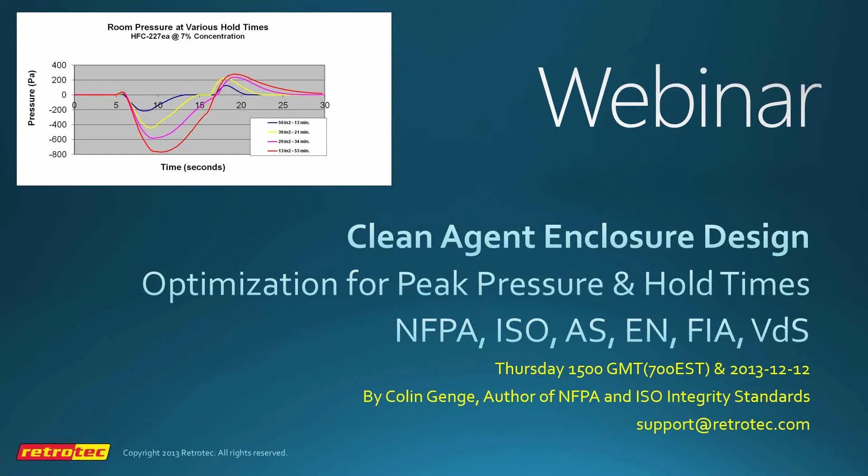I'm not going to focus on these as much as I've done in the past, but suffice it to say that the Door Fan test has replaced the discharge test. The discharge test was costly, disruptive, but its main negative feature was its environmental impact, which deep sixed it. So it's seldom used anymore except in CO2 installations.

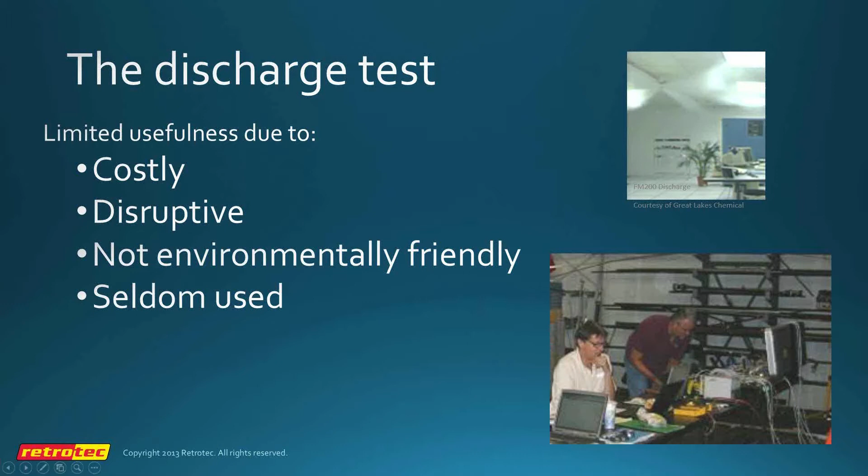There are 2 reasons to be using it now. There used to be only one. The second reason is to measure the pressure relief venting, which is a requirement of NFPA. And so far in the U.S., we've got roughly about half of the installers using the new software and doing peak pressure evaluations.

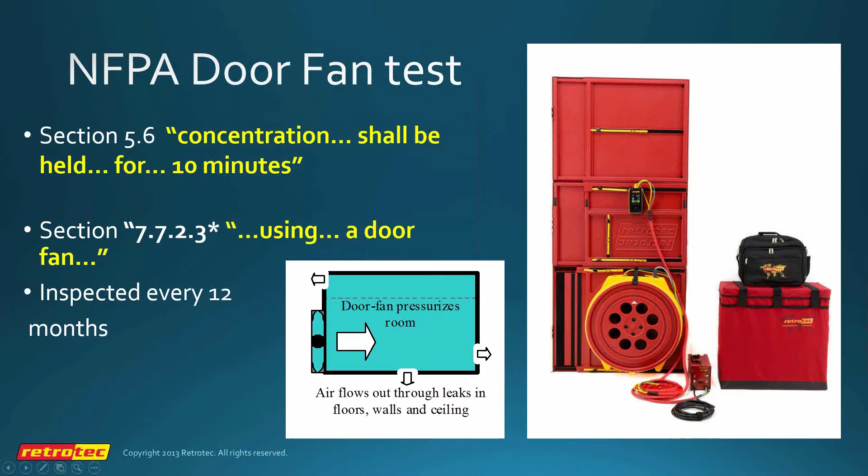This is the actual section in NFPA that talks about the requirement. Just a quick note on the NFPA, I didn't include this in my introduction, but back in 1984, I was the one who discovered that door fans could be used to determine whether or not a discharge test would be successful, and 3 years later managed to write a standard for NFPA that showed people how to use a door fan instead of doing a discharge test.

And as most of you now know, it's being performed in about 60 countries. ISO's adopted it, the European norm has adopted it, and so on. So it's become pretty popular. I spent the last 5 or 6 years rewriting most of the NFPA standard in order to make enclosures pass more easily when they should pass, and at the same time to allow them to pass the peak pressure requirements or to measure the effectiveness of vents.

You can see here with the old NFPA, we've got an FM200. With the old NFPA it would give 9.3 minutes and fail. The new one would give 10.4 - not a lot, but around a 12% improvement there. And on the peak pressure side, if the peak pressure requirement was 250, the new NFPA would pass, the old NFPA would not pass.

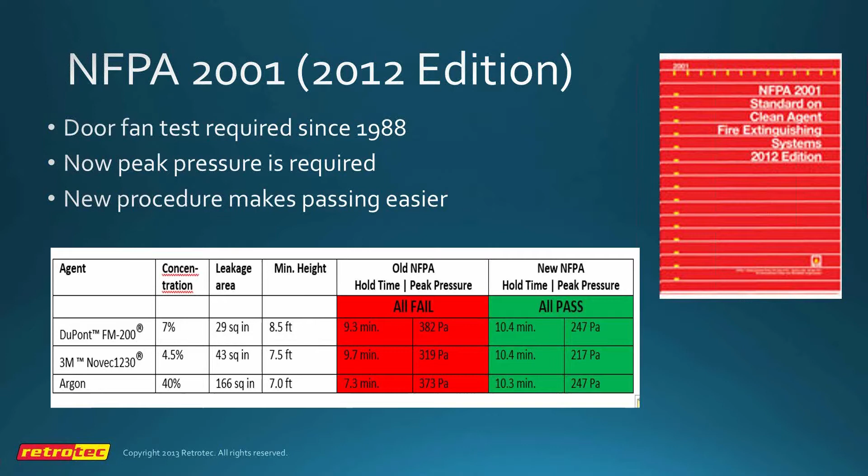So there's not too much that we don't know about it. Most of the manufacturers of equipment and agents rely on us for peak pressure and enclosure integrity, meaning hold time issues.

The ISO 14520, 2006 edition, also requires a door fan test. The calculations are different. It uses what's called a wide interface, which decreases hold time by 25%.

The new proposals that we have accepted by the ISO committee remove some of that conservatism, and in some cases it's extremely conservative. The NFPA is optimistic in some cases, but the truth actually sits somewhere between the two, and we're in the process of resolving that.

One of the issues with the ISO standard is that in one of the sections it requires protection to 90% of enclosure height. Many countries have written that out of their standard, that they don't require that. It forces the enclosure to be exceptionally tight, I think unnecessarily tight, and forces the use of PRVs in every installation.

Which can be a good thing, I guess, but it does provide an element of risk in that the enclosures are so tight that if the system discharged and the vents didn't work, the room has danger of being damaged, and in some cases it's quite likely.

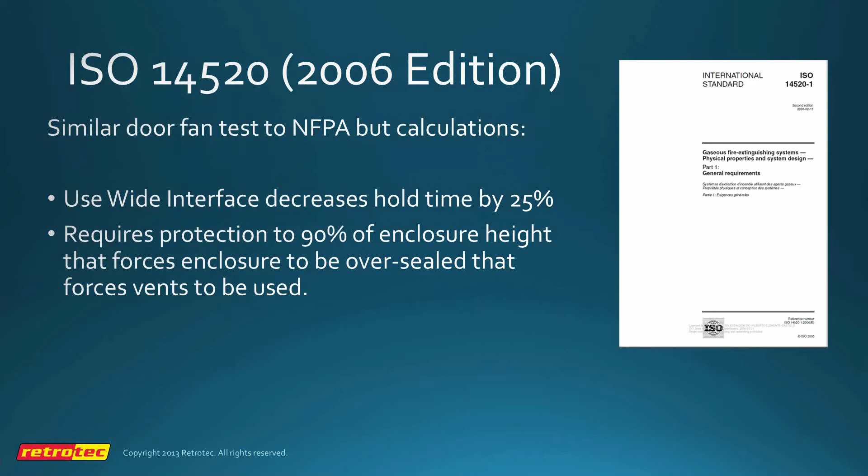So the first thing we're going to talk about is peak pressure. In the sequence of events, an agent is discharged, and unfortunately in these cases a little bit too much pressure was created.

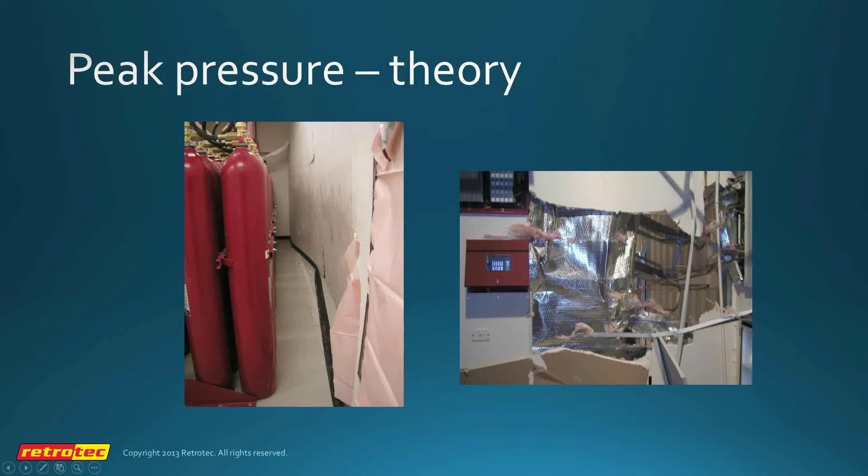If an agent is discharged into the enclosure, and in the case of an inert, for example, which most of you would be most familiar with, certainly from a peak pressure standpoint, we get a very short-term, short-duration pressure spike, where the valve opens wide open and goes up to its maximum point in 2 or 3 seconds and then drops off exponentially.

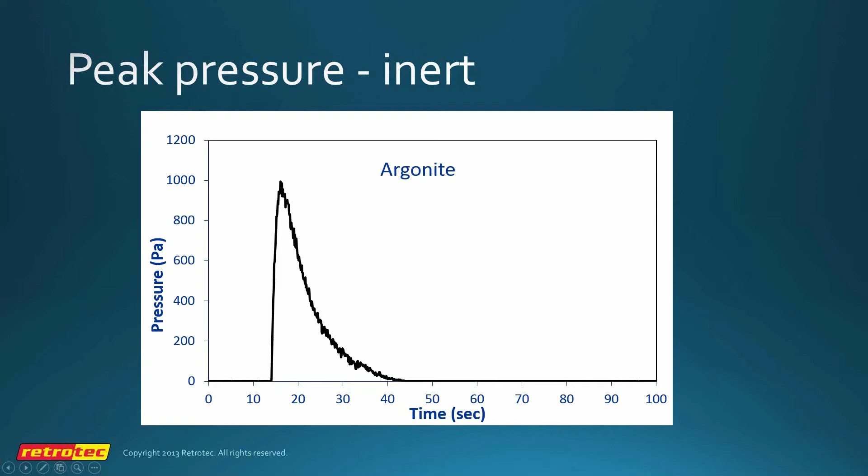What wasn't known until we did our research study was that the halocarbons can produce just as much peak pressure. If we were to discharge this into the same enclosure, a halocarbon and an inert, the inert would produce much more pressure. However, because the halocarbons are much heavier, they must be much, much tighter, so therefore they get more pressure. So in the real world, they often produce roughly about the same amount of pressure, but it depends.

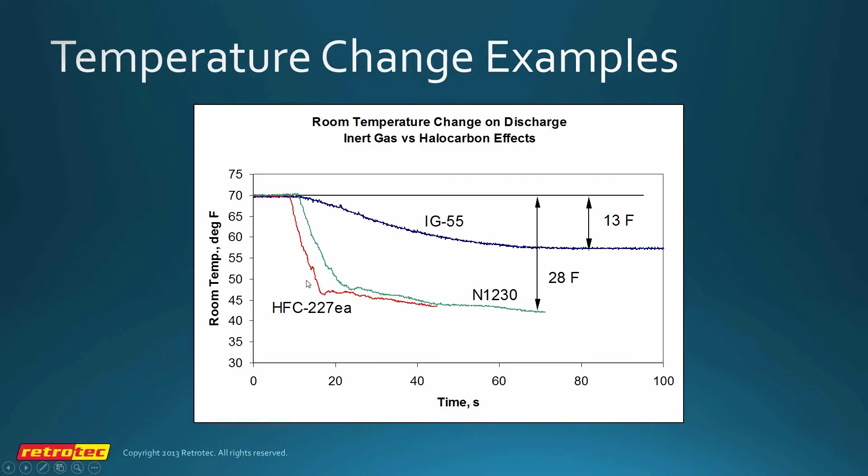The cooling with both halocarbons that we have here, 227 and Novec, is much, much more of a negative pressure creation. But the important part is the time at which it takes. Here, this cooling of the room happens in 4 or 5 seconds, and that's what produces a negative pressure spike that looks something like this.

So this one looks like a characteristic curve of Novec, has a very high heat content. So this is zero pressure. Upon discharge, the pressure drops.

As the agent, after most of the agent is in the enclosure, there is a period where the nitrogen in the tank is blowing down, and there's not much more agent coming into the room. The agent flashing from a liquid to a gas is what causes cooling, just like if you put alcohol on your hand and it evaporates, you get cooling.

The positive pressure spike is a result of increased mass coming into the room, no more cooling going on, as you saw in the previous graph, and a bit of a positive pressure spike.

This negative pressure spike is determined by the relative humidity. If the relative humidity is very low, this pressure spike is very large. If the relative humidity is very high, this negative pressure spike can disappear altogether. And the way I like to explain that is if we try to get a liquid to evaporate in 100% relative humidity, it doesn't evaporate very fast, so therefore there's not much cooling.

So along with everything else, when we're dealing with the halocarbon, we have to know the range of humidities that we're expecting in that enclosure to determine the range of peak pressures that we might experience.

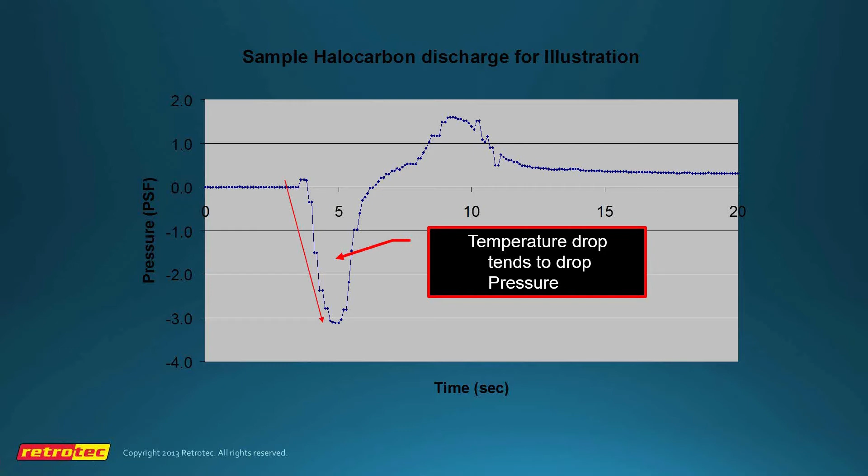So again, here's another halocarbon, in this case HFC 125. You notice they all have the negative spike followed by the positive spike.

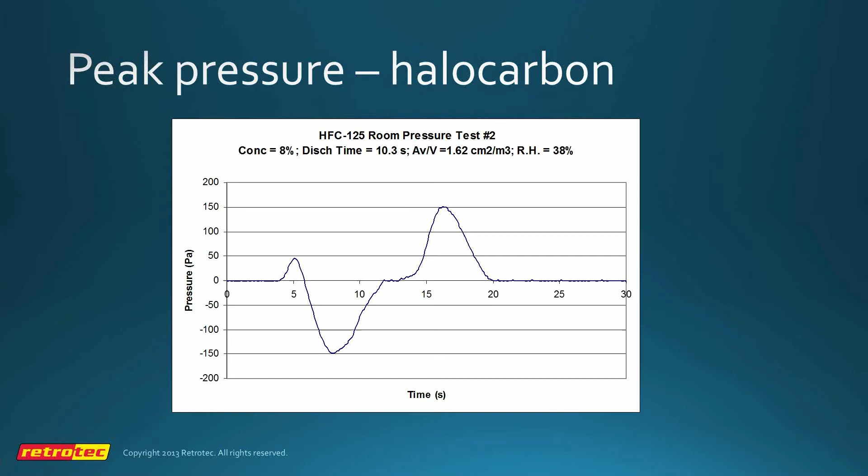This negative spike depends on what we call the leak to volume ratio. So if we have two enclosures, one's twice as large, and the second has twice the leakage of the first, they will have pretty much exactly the same peak pressure. As the enclosure gets tighter, the peak pressures become greater, and it just magnifies the size of that curve.

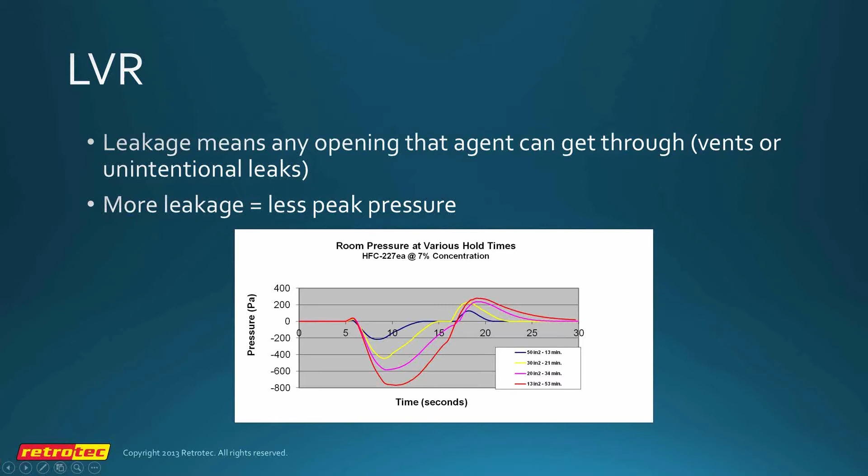And if the leak to volume ratio is sufficiently small, then we may often have to install a PRV to control it.

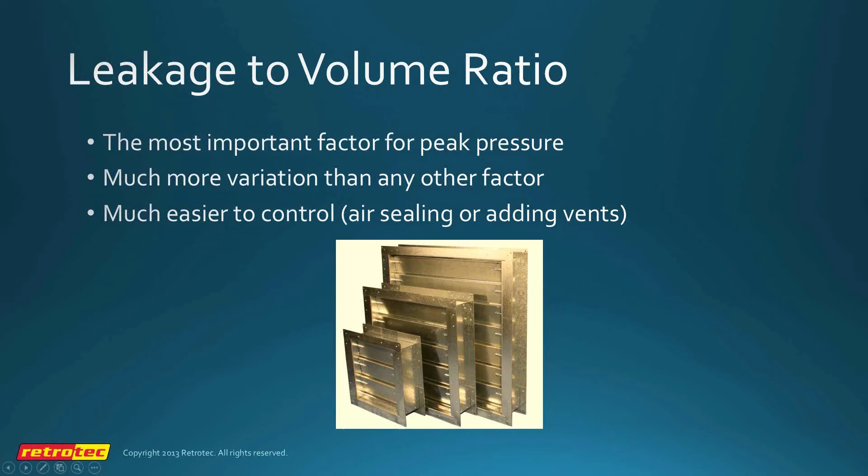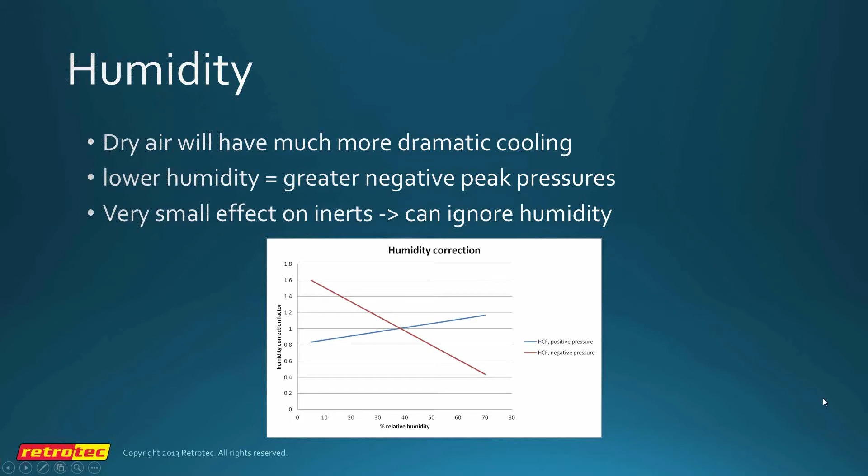There are important design features that must be considered for peak pressure. First, we have to know the enclosure strength. We need to determine the range of leak to volume ratios and estimate the peak pressure based on the agent type, the type of valve, discharge rate, and the leak to volume ratio. And then that would go into the sizing of the vents.

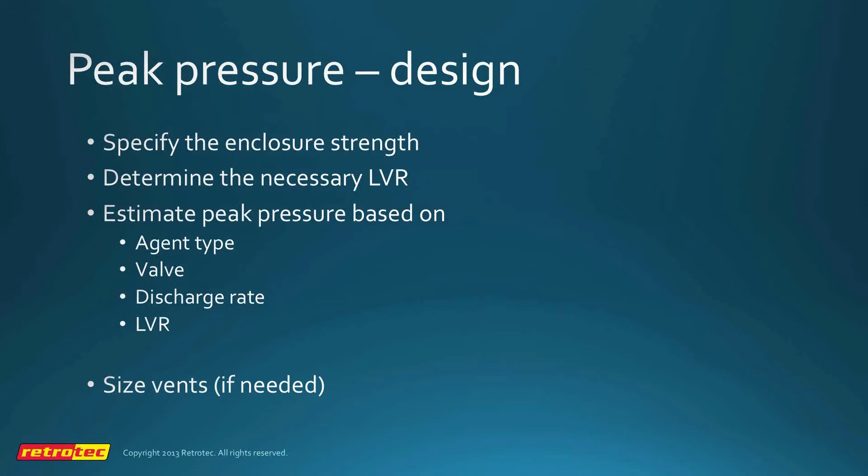NFPA requires the working plans to include an estimate of the maximum peak pressure, and a specified pressure limit has to be included - I believe this is Annex D1, this is NFPA. The enclosure, of course, must be capable of withstanding that pressure. So there's various bits and pieces spread throughout the standard that talk about peak pressure evaluations.

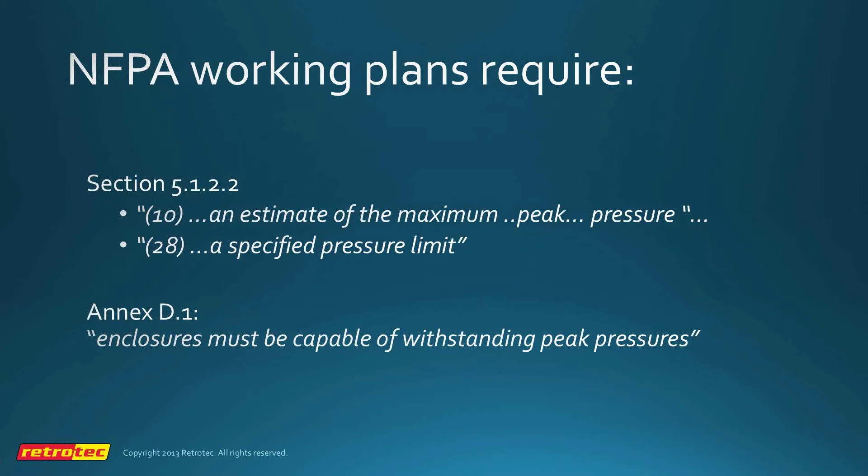Under ISO section 7.4.1, we have very similar wording. The standards are almost rubber stamps of each other - a lot of the wording is identical, and the intended purpose is very, very similar.

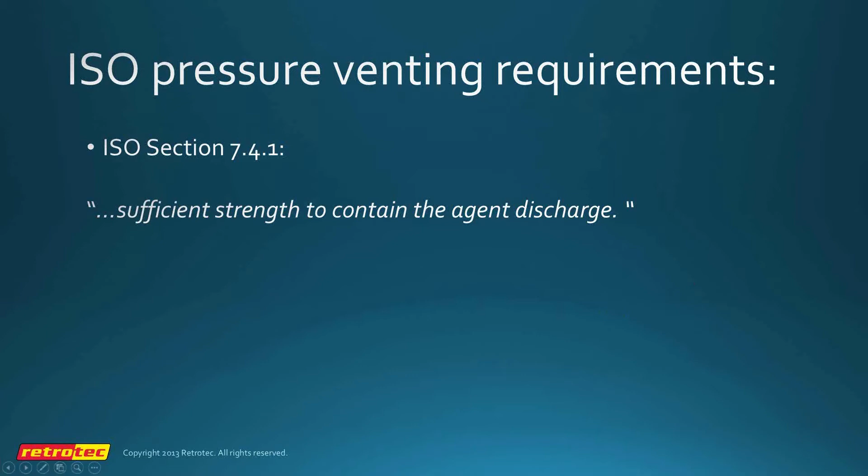Our peak pressure study went on from about 1998 for 4 or 5 years - we thought we'd be done in the first year, but we didn't complete it until 4 years later. What we discovered was that there's a variety of peak pressure formulas out there, most of them supplied by either the agent or the equipment manufacturers. These are three - I'm not identifying which ones they are.

There's a couple problems with how they were created, three altogether actually. One is that they assume the relationship between pressure and peak flow rate, which is what causes peak pressure, is a square root relationship. It's not a square root relationship. So these formulas are mostly square root relationships, but this is not a square root relationship - this is the data that we took.

The other thing is that they were not taken at the area of interest. The area of interest is actually in a leak to volume ratio somewhere in this range, because the enclosures are tightened down to get a 10-minute retention time, so we kind of know how tight the enclosures are. The data was probably taken somewhere in this other area - I'm not sure, but it wasn't taken in the area of interest, and it wasn't taken over a wide enough sweep.

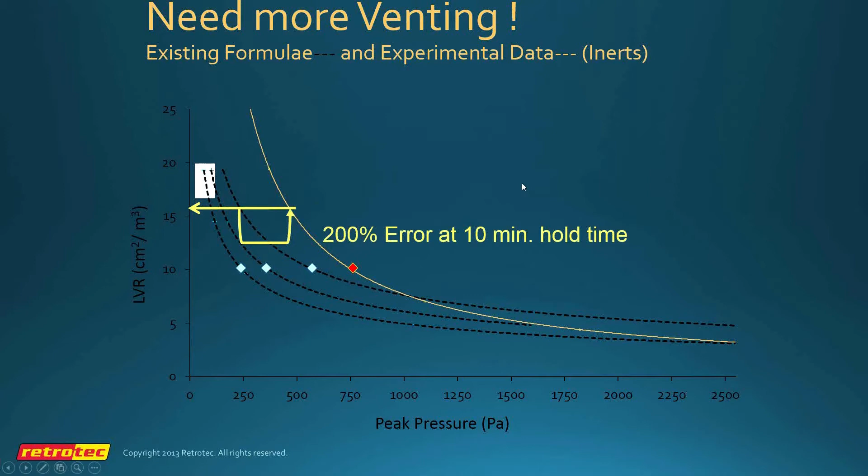So the message there is that the existing formulas, the existing data, is under-predicting peak pressure by 200%, sometimes 400%. That's the first thing people say when they run the new equations - oh my God, VDS says that we're going to have only a quarter of the pressure that you say.

Our data was done over a wide range, and more importantly, the data was taken in enclosures that were measured in the same way that we measure them with the door fan. If we have an enclosure leakage area, there's a lot of different ways of measuring enclosure leakage area.

In order to make sense of this, we have to be measuring the enclosure leakage area the same way we're going to be measuring it on the job site. There hasn't been correct correlation because manufacturers over the past 10, 15 years have been creating their peak pressure formulas without measuring enclosure leakage the way we measure it in the field, so we don't get the proper relationship.

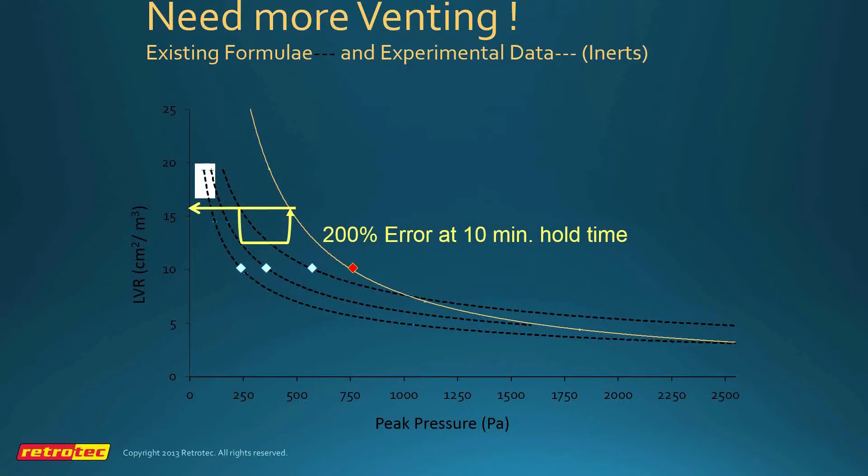So for all those reasons, the existing peak pressure formulas out there don't predict anywhere near the peak pressures we're actually getting. That's the bad news. The good news is these enclosures will actually take a lot more pressure than we thought they would. I think peak pressures in the range of 1,000 pascals are commonplace and get experienced all the time. We just haven't come to accept that.

The way that we evaluate that is with what we call our FanTestic Integrity software. I think most of the integrity tests done worldwide have been using our software since 1986. Roughly around 3,000 different companies have been using it on a regular basis. I would guess that probably 1 million tests have been done with our software in the past.

The addition we have now is the peak pressure part - we say venting and peak pressure analysis has been added. We did have peak pressure analysis in our old CA2000, which was the best information available in the year 2000, but unfortunately it wasn't very good, and a lot of it was manufacturer's information. We now have much better information, which is why we're no longer supporting our old CA2000 software and going with FanTestic Integrity, because it's the one that gives the right answers.

There's various questions here about the performance of different agents and so on, and it's simply a matter of putting those agents into our software and it gives you the peak pressure values. We'll be going over that in more detail as we progress.

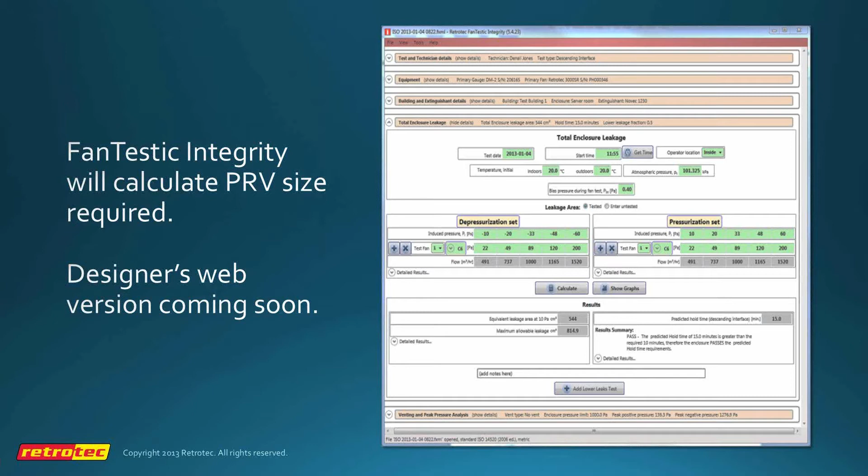I want to move on to the next item - this is a dual acting PRV. You can't actually tell it's dual acting just by looking at it; in fact, it might not even be dual acting. But these dual acting vents can be ordered, and more importantly, they can be measured with your door fan. Whenever I get one, I slap it into a cardboard box and apply some pressure with my door fan to see how that vent performs. They just about always perform very differently than the manufacturers say they perform. Sometimes there's something about the vent itself or the installation that prevents it from performing properly. It's very easy to use your door fan to check these vents.

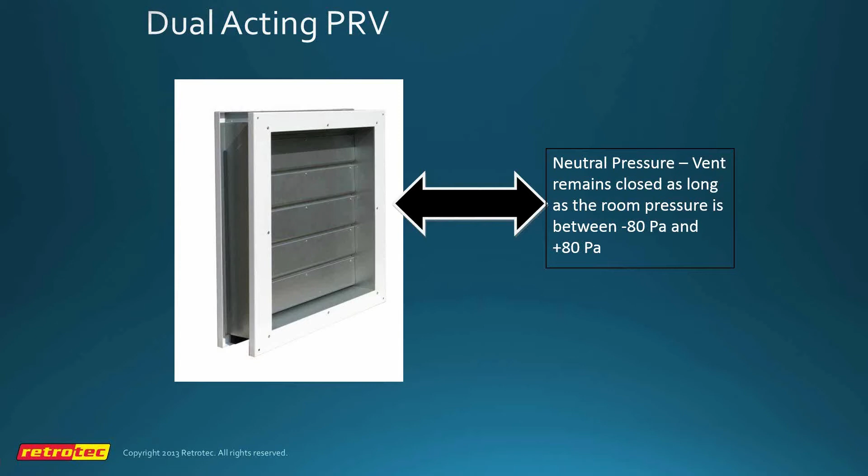I like to have them fully open at around 80 pascals or so, 100 pascals in that range. This fan system we have here is probably very similar to the fans that most of you have. We've developed what we call a contra-rotating fan that will measure PRVs at 500 pascals and put out 4,000 CFM at 500 pascals, making flow measurements that normal fans won't do. If that's something you're interested in to measure the performance of your PRVs, by all means, talk to us about it.

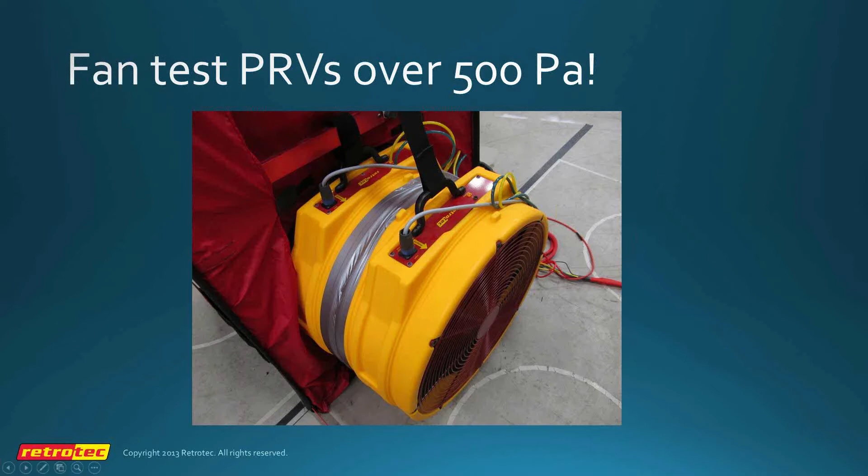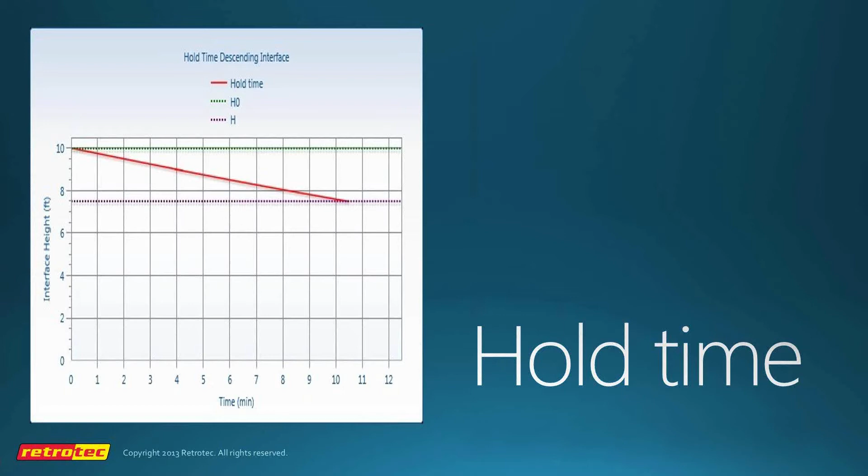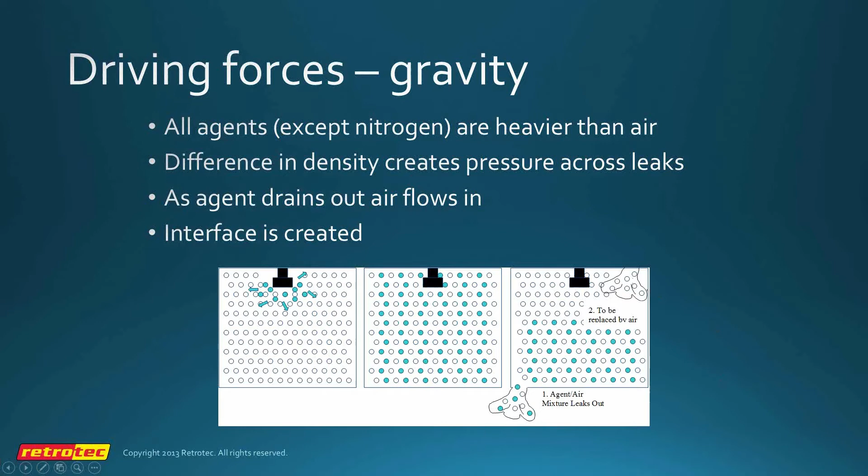So now we're on the hold time part. We've covered the pressure relief venting, now we're into hold time. The driving force for hold time is primarily gravity, at least in most cases. Agent leaks out the bottom, air comes in the top, and you get an interface between the two. There are dynamic discharge pressures that occur when the agent releases that we've talked about.

These peak pressures, even though they may be quite high, there's an assumption that they result in a lot of agent being lost. In fact, they don't, particularly with halocarbons, because there's so much cooling. When the agent is released, the agent's not going out, but air is coming in, so we're actually increasing the mass inside the enclosure because we're cooling it. So we don't actually lose anywhere near the amount of agent that we thought we were losing - particularly with halocarbons, we wind up keeping almost all the agent that's discharged.

The formulas say that if you do a 10% concentration, you're going to lose roughly 10% of your agent. In fact, you lose maybe 1 or 2%. As a result, if you're discharging say 10%, you actually wind up with 10.8 somewhere in there most of the time. Not quite the same with inerts, because there's not as much cooling with inerts - there's a lot more mass of agent going into the room. The concentration formulas for inerts do allow for much more losses. So in both cases, you will get more concentration than the manufacturer's equations dictate.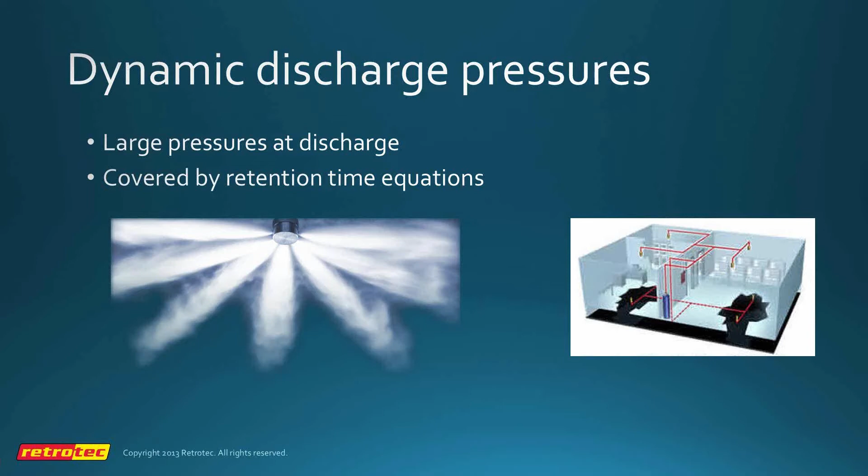The next thing that will push the agent out are static pressures. In some cases, we might have pressurized control rooms, pressurized rooms on either side, up, down, or sideways. We have to go around the enclosure and measure the pressure underneath all of the doorways to find out what the pressures would be during the discharge. And very simply, that's how we do it.

In some cases, stack effect will cause a static pressure. Buildings that are very, very high can sometimes have a 50 pascal stack pressure. The kinds of pressures we're dealing with in these enclosures due to gravity are 1 or 2 pascals for inerts and 10 to maybe 15 pascals for halocarbons. So stack effect can be huge.

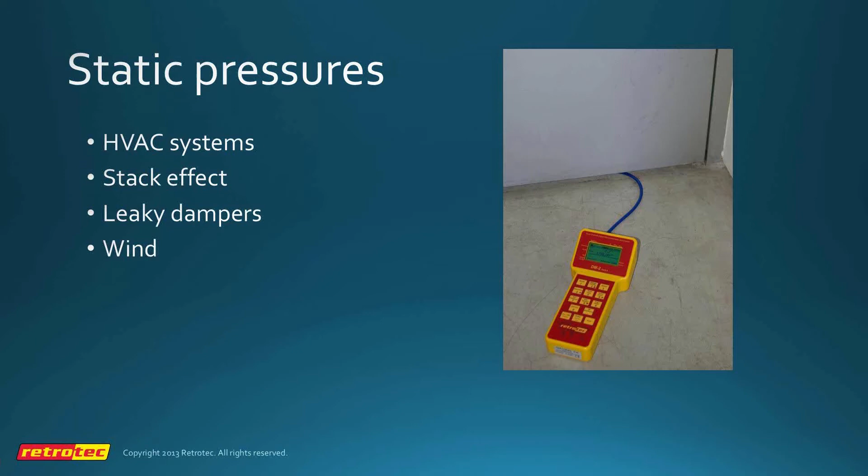Leaky dampers in the HVAC system can cause agent to get sucked out, and wind can also blow the agent out. For many years I've put proposals in for wind losses, which I think can be the same as gravity losses, but I can't seem to get anyone to pay attention to that. They are still real in enclosures that are exposed to wind, and wind can be the major driving force. That would probably fall under the section that requires special engineering, but it's something that needs to be considered.

So NFPA employs what we call a sharp interface. It says that at time equals 0, the agent fills up, or the enclosure fills up with agent. Agent runs out the bottom, and we've got a layer of air on top, as you can see here, as time progresses.

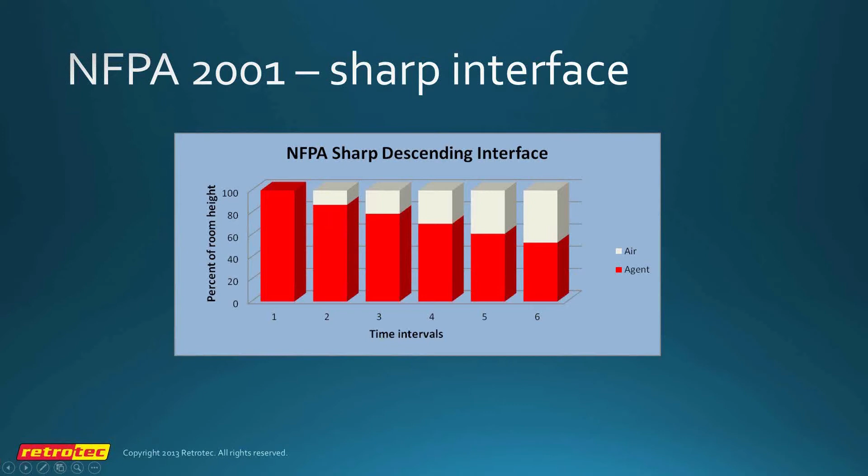The ISO assumes that we have an ever-widening interface, a slow mixing between the agent and the air. In fact, the truth is somewhere in between those two, and these agents, when they come into the room, have what we call a characteristic thickness. Most of the time, for halocarbons that runs around 0.2, 0.3, 0.4 meters, up to about 1.1 meter for an inert. So it's not an ever-increasing interface thickness—it does get thinner. In fact, we've noticed that as agent comes out, the interface, instead of widening, actually gets narrower. We have all the documentation for that, which is why we've come up with new equations that ISO has accepted for what we call not the wide interface, but the thick interface.

Todd Hetrick of 3M and myself worked on this. He did his master's thesis on that, and I consider he and I to be the two world experts on interfaces. Fortunately, all the information that we have on that is in the standards at this point, or in our software.

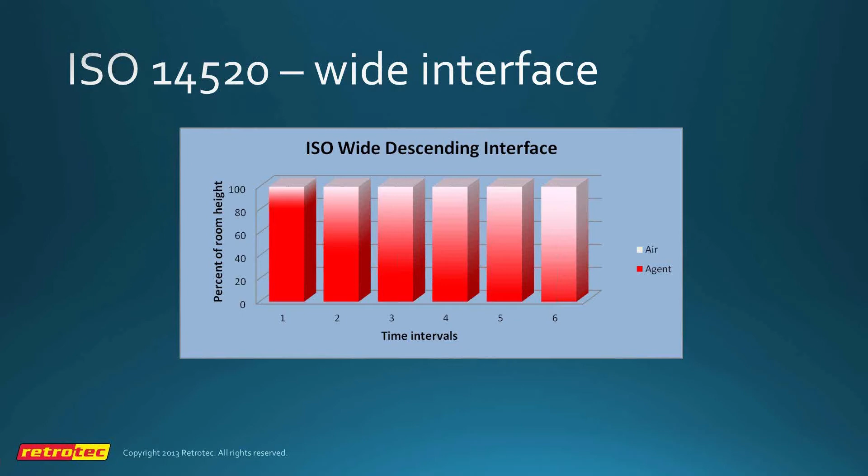Now, someone said the sound is completely gone. I show that my sound is working here. If anyone else can still hear me—it's back now. Okay, all right, good. Thank you very much. Hopefully I wasn't saying anything important during that time.

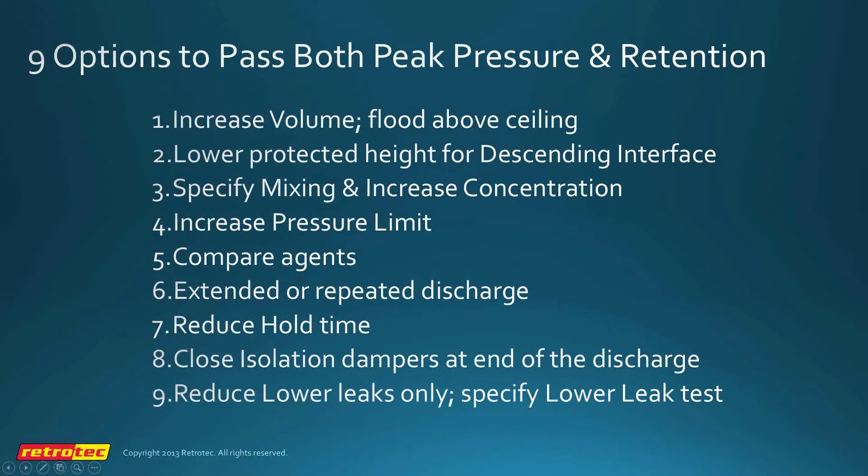In this section here, we've got 9 options to pass both peak pressure and hold time. Essentially, the name of the course is Optimizing Enclosure Performance, and this is how we optimize it by looking at these options that allow us to pass both peak pressure and hold time. Now, I've improved this from the previous versions by showing you examples in each and every case. So there's all 9, and we'll run through the first example.

The first example is that the more agent we put into the enclosure, the longer the retention time will be, and it allows us to have a leakier enclosure, which means we're going to have less peak pressure. The reason why these enclosures create peak pressure is we tighten them up so they have the appropriate hold time, and then we get too much peak pressure.

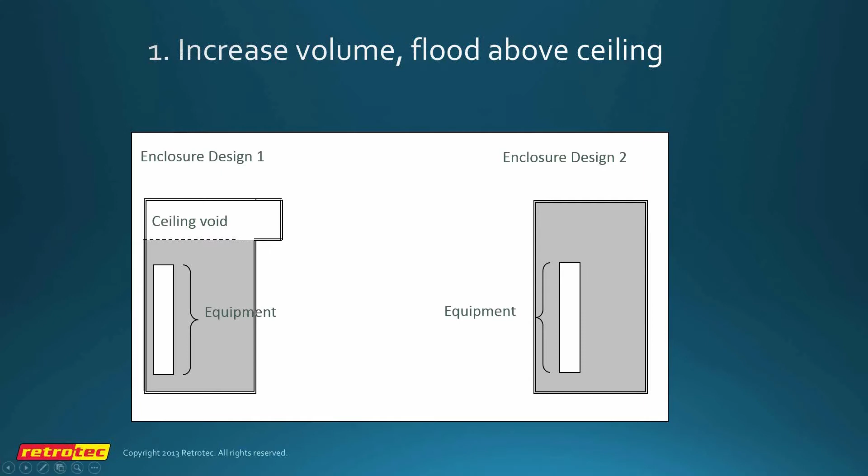So in this example, we've got a ceiling void where very commonly in the US we do not flood the ceiling void. In Europe and most other places they do. Using our new software, I've got two of them here—the before and after, if you will—one kind of superimposed upon the other.

So we've got a pretty much identical enclosure: 10,000 cubic feet, 10 foot high. This is what would happen if we flooded it and our minimum protected height was 9 feet—we would require a PRV of just over a square foot. If we flood the above ceiling space, we increase our volume, and we increase our maximum protected height.

The minimum protected height stays the same—we're still protecting to the same height. But this allows us to have much more leakage in the enclosure, which means we don't have to install a vent. It might sound like I'm encouraging people never to install vents, but this is the way you can get both hold time and peak pressure in the enclosure. The other way of looking at it is that I'm showing you a design technique that improves both circumstances.

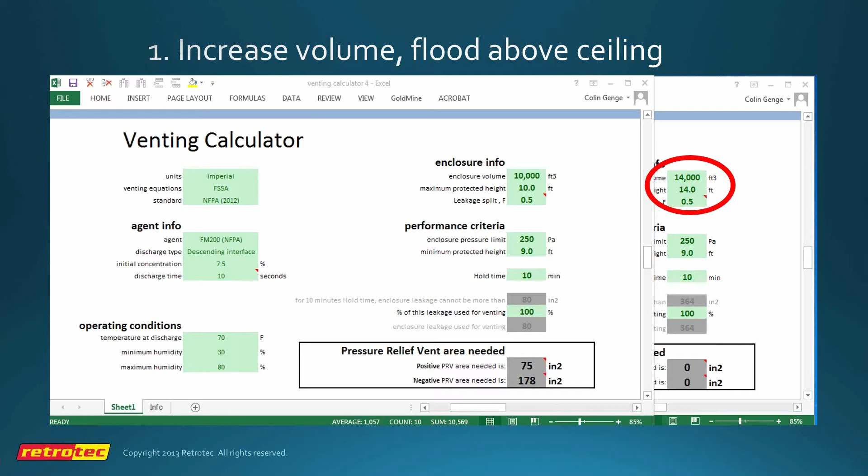Looking at it the other way, if we keep the total flooded height as low as possible, we're not improving fire protection, we're not improving the hold time, we're not improving the peak pressure situation. So that's the first example.

Number 2 is to lower the protected height for the descending interface. It doesn't make any difference for continuum mixing, but for descending interface it does.

So here's another example—this is number 1, and I've got number 2 superimposed. The only thing I've changed is the minimum protected height, from 9 feet down to 6.5 feet. You'll notice here again we need a vent, but here we don't need a vent. The reason for the difference is this enclosure does not have to be tightened as much, so we've saved money in not having to air seal it so much, and we've allowed it to pass both the hold time and the peak pressure requirement.

I can't tell you how many times I come into a room where they've got racks that go up to 6 inches from the ceiling, and they want that room tightened up enough to give them the required hold time—it's virtually impossible to do that. So we have to know that we want as much agent on top of the protected equipment as possible, not the smallest amount of agent. Seems kind of intuitive, and it is.

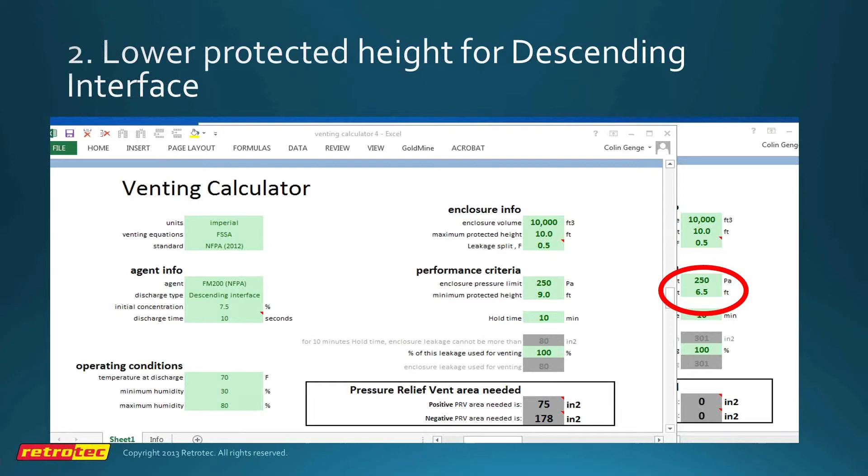So the next one is to specify continuous mixing. This is probably one of the most commonly misunderstood features of hold time. It's assumed that there's equipment at a certain height, there's a minimum protected height, and there will be a descending interface. I think there's only descending interface roughly about half the time.

There are thermal effects inside the room, particularly with the inert agents, that cause the agent to get mixed. There are often cooling fans in the equipment sufficient to keep the agent mixed. You might ask, how do I know? Well, when we do a test on an enclosure, I go around with smoke and look at the movement patterns—if I see air from the equipment cabinets going all the way up to the ceiling and forming big convection loops, I know they have mixing in that room.

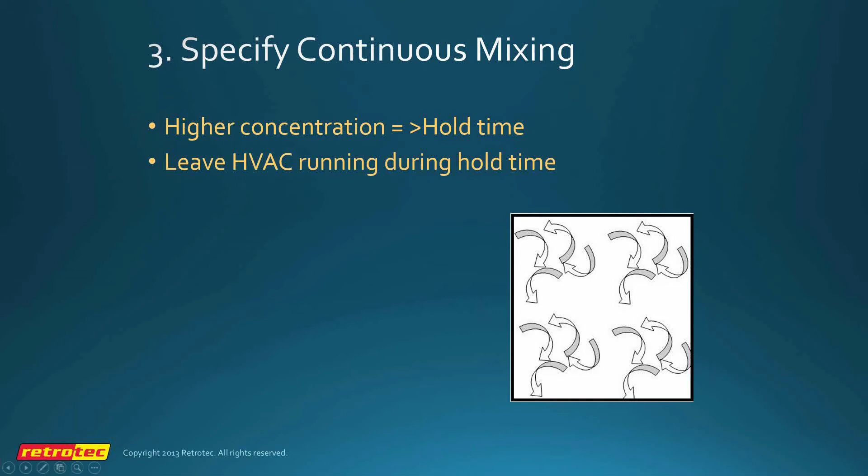So the good news is, if you want to protect equipment at a very high height, mixing is the way to go. Let's go to the next slide and see an example.

Again, two enclosures—I've done two evaluations here side by side. The only difference is this one is a descending interface, this one is continual mixing. You'll notice I've increased the concentration from 7.5 to 10%. Let's say the design concentration was 7; over here we've got a little bit extra, 7.5. That's fine. Here the criteria is, how long does it take for the descending interface to fall to 9 feet?

That's the performance criteria. Over here, the performance criteria has changed—it now becomes, how long does it take for the initial or design concentration to fall to 85% of design? If design was, say, 7, then 85% of that is about 6.3. Don't quote me on the exact numbers, but the principle is the same.

So here our performance criteria is the concentration we want to hold to, and in continual mixing, notice I've added more agent—about a third more—and this is totally necessary when doing continual mixing. It's not that the design concentration has gone up; the design is still the same. If the design was 7 before, it's still 7 after. I think I call it 'extra design,' though there's not really a good term for it—NFPA has like 6 or 7 terms describing concentrations, but not a good one for this.

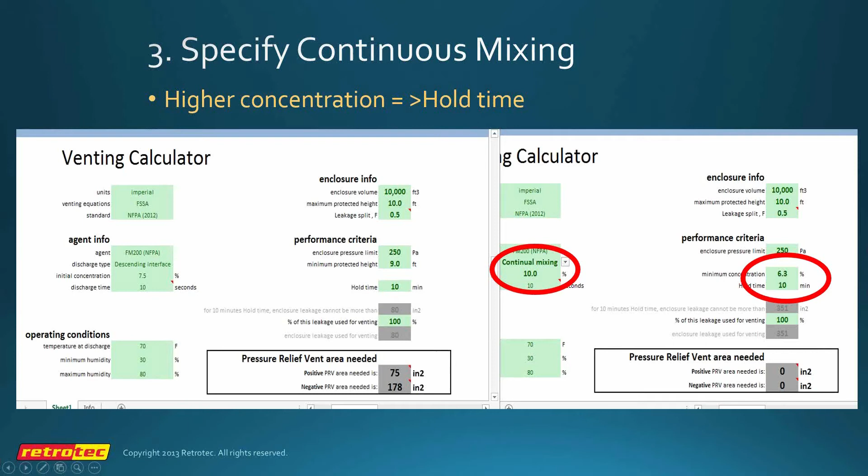I guess my idea here is that the enclosures are intrinsically safe. We don't want to put design aspects into the enclosure that rely upon vents to be working. We want them, if the vents happen to fail, then we're still okay. So we're talking about design characteristics in the room that will make the rooms intrinsically safe.

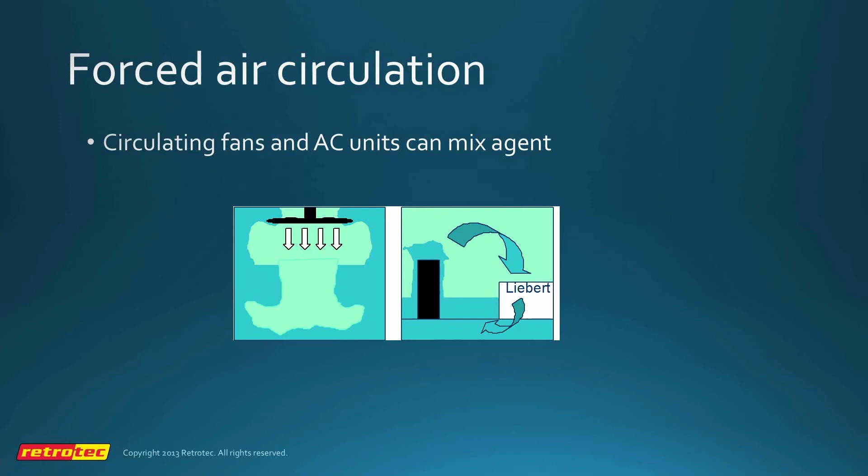So now the next one is to increase the enclosure pressure limit. I know for a fact when peak pressure first came out, people said, oh my God, let's say we only can withstand 2 PSF, that's the way we'll be safe, right? Or in pascals, around 100 pascals. The problem with that is it's unrealistic and somewhat unachievable. It's even hard to get a vent that opens fully at 100 pascals.

We know for a fact, as I said earlier, that these enclosures are regularly experiencing 500, 750 pascals and so on. The only study I've been able to find is this one - I can't remember who did it, but it's in a publicly available paper, not our information - and it shows that a regular 2x4 stud wall, 16 inches on center, can take 13 pounds per square foot, which in terms of pascals is about 50 pascals per PSF, so that's around 650 pascals.

As we go up to 2x6 walls, they get a little bit better. These are the guidelines I normally use: a well-constructed 2x4 wall, sheetrock on both sides, supported at the top and bottom, will easily handle 250 pascals or 5 PSF. When you go to 2x6, it's up to 10 PSF. You go to 2x8, it's 15 PSF. Reinforced concrete will easily take 20 PSF. This does not necessarily include concrete block walls.

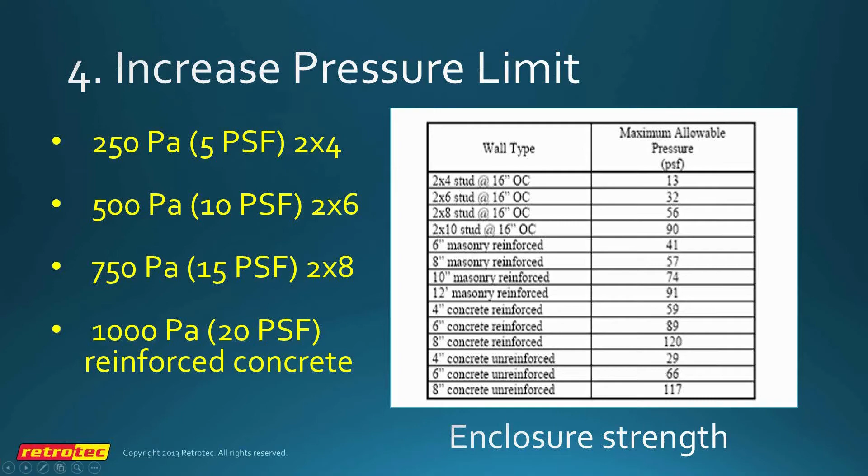The other thing that happens with concrete block walls, which is interesting, is because the block walls don't give at all when the discharge occurs, they tend to create more peak pressure, about 30% more peak pressure with a concrete block wall versus a gyprock or sheetrock wall. The sheetrock wall might move even 1/8 of an inch, which will reduce the actual peak pressure by around 30-40%. Seems unbelievable, but you can do the calcs and prove it to yourself if you really want to. Our testing has proved that, so beware.

So number 4 is to increase the peak pressure limit. Here we show a peak pressure limit of 250 pascals and we need a vent. We bump it up to 750, all of a sudden we don't need a vent. So that's all it takes.

This calculation, which is running in Excel right now, we have released to some of you, but there have been some calculation problems in it, and we are in the process of putting it on our website so anybody can use it, and also putting it into our software.

The calculations this does are exactly the same as the enclosure integrity software, except it looks at it from the other point of view. Currently, the enclosure integrity software assumes that you're building an enclosure and then you test it for peak pressure and you test it for hold time. If we're designing an enclosure, we don't have anything to test yet, so we're looking at it from the other standpoint. What we're looking for is the gap between the leakage that I need for peak pressure and the leakage that will create the hold time that I'm interested in. A properly designed room will have a gap between those two. The more overlap they have, the more that we have to rely on vents.

So this software is designed to show you various scenarios. Over here you can change the venting equation you're using, the standard that you're running, whether you've got interface, initial concentration, all of the factors. You notice humidity is in here as well, the humidity range that you're looking at, and you can do a dry run before you even install the system.

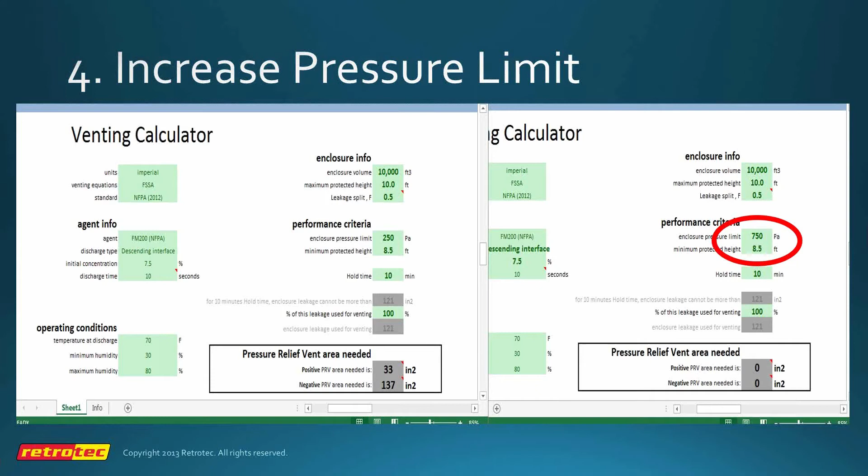In a lot of cases, if I was able to take a look at the design before they built it, I could tell you, you're going to have problems with this, you need to change this and this. The cost of changing it at the design phase is very, very small. The cost of fixing it 2 days before the room is occupied is very high. So that's why we have this tool there, and that's why we're talking about it.

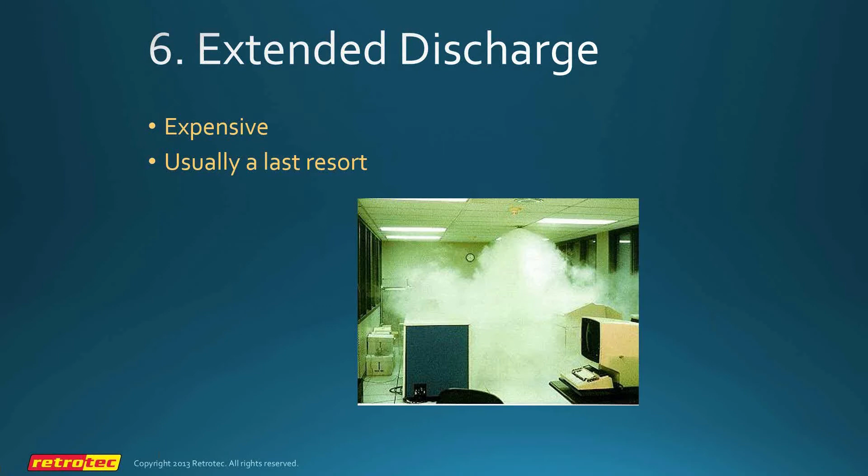We can get some kind of an idea ahead of time. We can take a look at what the hole size would be if we've got a very leaky enclosure. We can make some design considerations, and as we saw in the previous slide, notice if we're looking at a leaky enclosure that the inert can be much, much leakier, so that tends to favor the leakier enclosures. Sometimes they have enclosable openings and so forth.

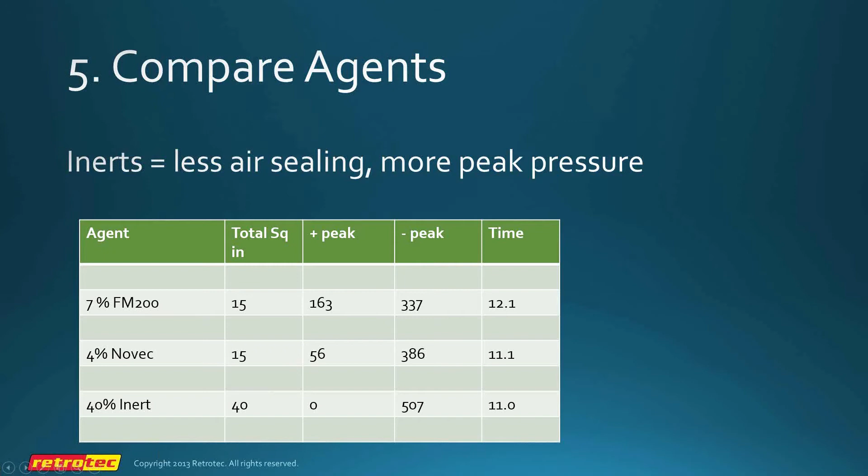If you have a very small enclosure and you've got trained personnel that are within minutes, you could actually have a 2 or 3 minute retention time. We bring this up because of these really tiny enclosures that they have, very, very difficult in some cases to get a 10-minute retention time. So we need to know that ahead of time.

It's called the small room problem. It's our most pervasive problem, literally hundreds if not thousands of calls on the same problem: I've got a small room, I've air sealed the heck out of it, I got a 2-minute retention time, and I can't get it any tighter.

Some of the other features that we've talked about earlier are important to consider: having as high a possible maximum protected height, putting in as much agent as possible, possibly considering continual mixing, taking a look at the agent that we're using. All of these decisions can be made in the design phase so that we don't wind up with problems when we go to test.

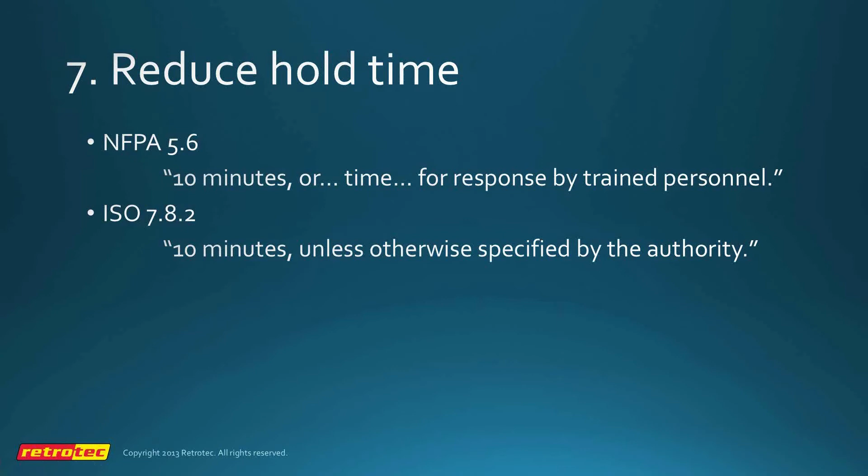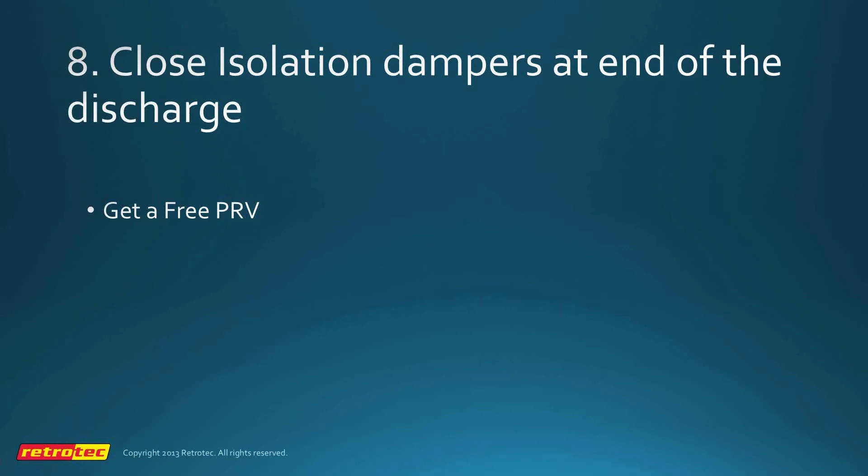Number 8 is to close isolation dampers at the end of the discharge. Typically all isolation dampers are timed so they close and then the discharge occurs. My suggestion is that in a lot of situations you can actually close the dampers after the discharge. You're not going to lose much, if any, agent most of the time, but that's an evaluation that can be done. You essentially get what I call a free pressure relief vent by doing that, particularly for existing installations where they've had excessive peak pressure. Just change the timing sequencing with your dampers and you can get the free PRV through the HVAC system. So it's something to be considered.

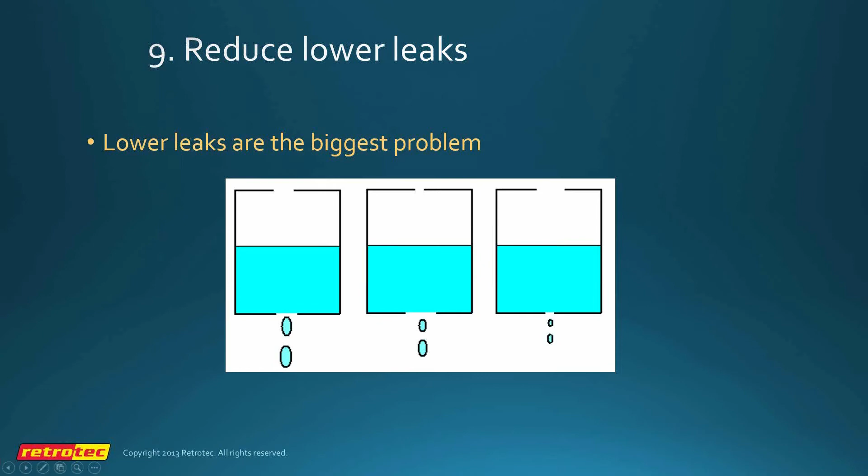The next one is to reduce the lower leaks. In many situations the only way that they can pass is to measure the leakage distribution. Both standards allow you to do this. It's actually cheaper, easier, and faster to measure the leakage distribution than it is to try and fix it. I've known rooms where they've spent $50,000 trying to seal them up tight enough to pass when all they had to do is measure the leakage distribution, which we can do in a number of ways.

First of all, here we've got a leakage split of 0.5. You notice that we need a vent. Here we can have an enclosure that's much leakier, which means we spent much less money trying to get it tight. We've got a leakage split of 0.1, which is allowed in NFPA. ISO allows 0.15, and we don't need a vent. So that's an indication of what happens when you measure what's called the leakage split.

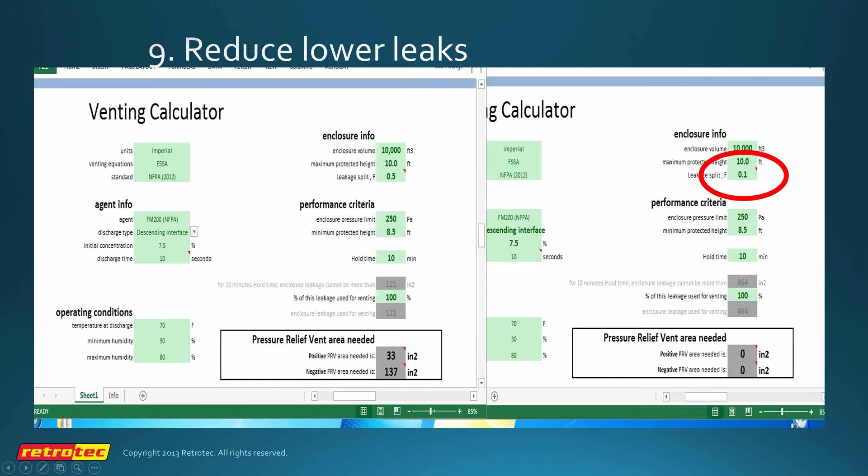Here we've got 3 enclosures that had excessive peak pressure. We measured the leakage split, which meant we didn't tighten the room down so much, and they passed the retention time requirement and the peak pressure time requirement. And how we do that...

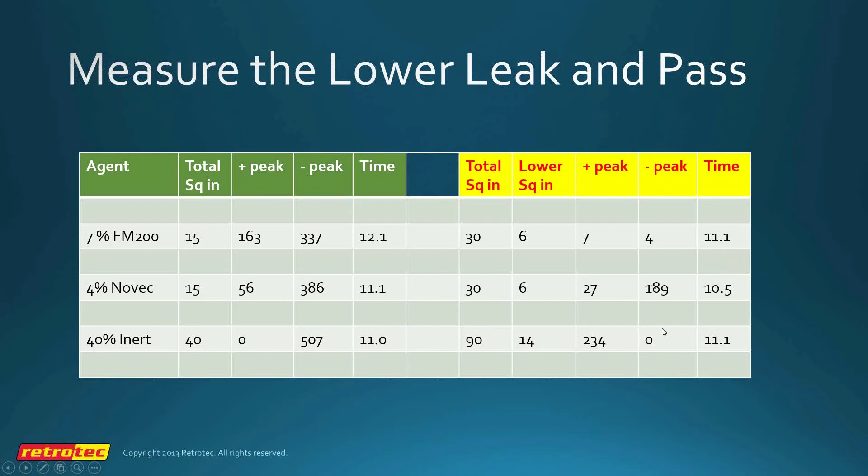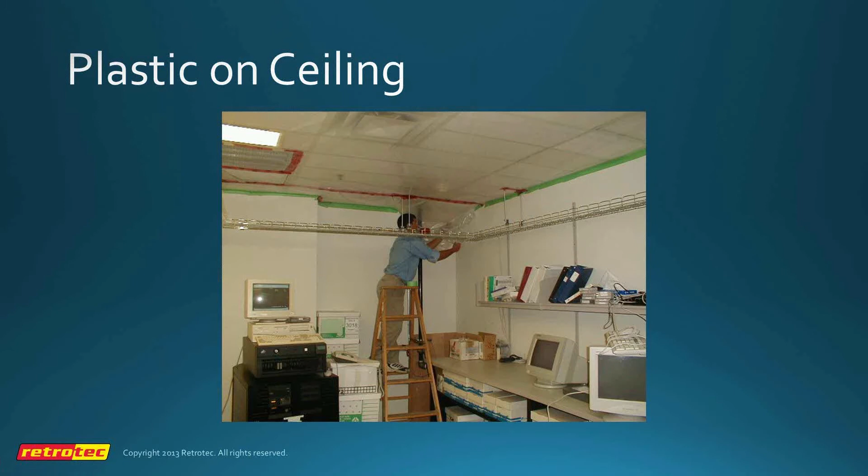The faster way is to use 2 fans, where this fan is measuring the enclosure leakage, and this fan is neutralizing the pressure across a suspended ceiling, which you need. The new feature in our new gauges will allow the operator to control the pressure across here to 0. So we'll set this fan to the pressure we want in the enclosure. After we do that, we set this one to 0, and the 2 of them will wobble back and forth for a while, for a couple of minutes, until they stabilize.

We used to have to do this with 2 people. We now can do it with 1. So we've improved that process, and our level 3 shows ceiling neutralization is, I think, one of the most powerful testing tools. I can typically do this in about 20 minutes more than doing a regular enclosure integrity test, and probably for past 25% of my enclosures I do this test, maybe a little less.

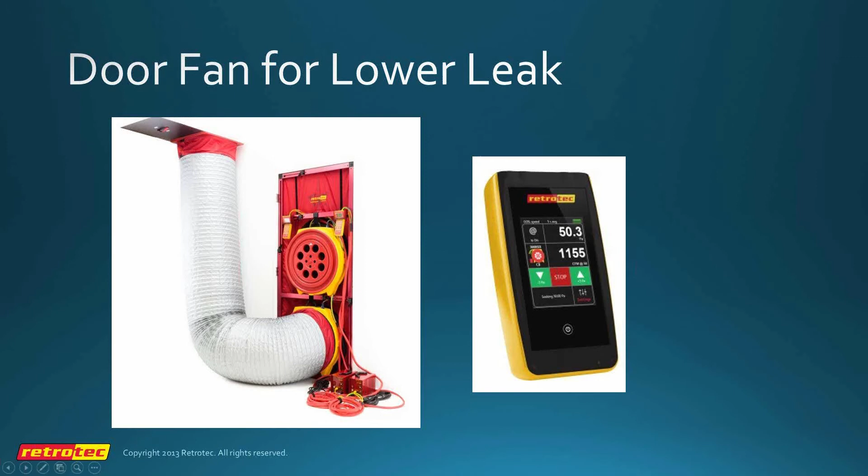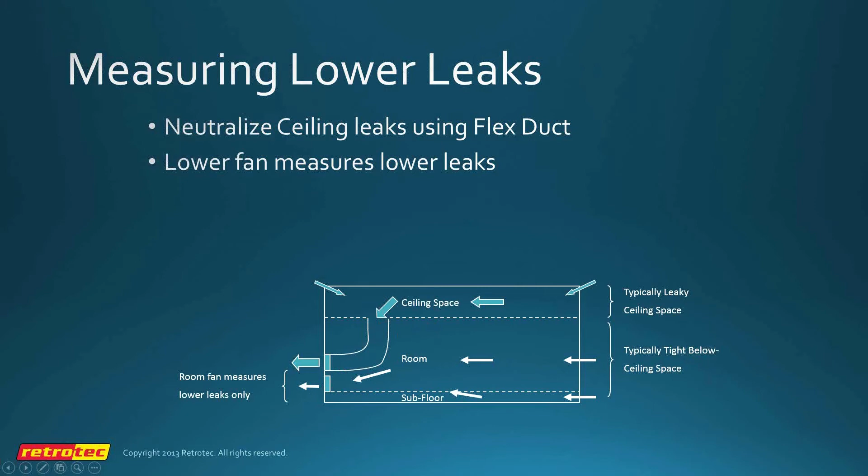And here we are. This is a graphic that shows one fan that's neutralizing the pressure across the suspended ceiling. The other fan is measuring the room leakage. So it's a major part of our training course to show you how to do that. And there's another graphic there showing you the same thing, and yet another one.

Another version of this is called the subfloor only test. So here we're measuring the pressure across the subfloor. We're pressurizing the room to neutralize the pressure across the subfloor, so we're measuring the subfloor only leaks. This is one way to measure leakage distribution as well. It's allowable in the NFPA, it's allowable in ISO, and this will tell you what the leakage is below the floor, and another way of measuring the below ceiling leakage area.

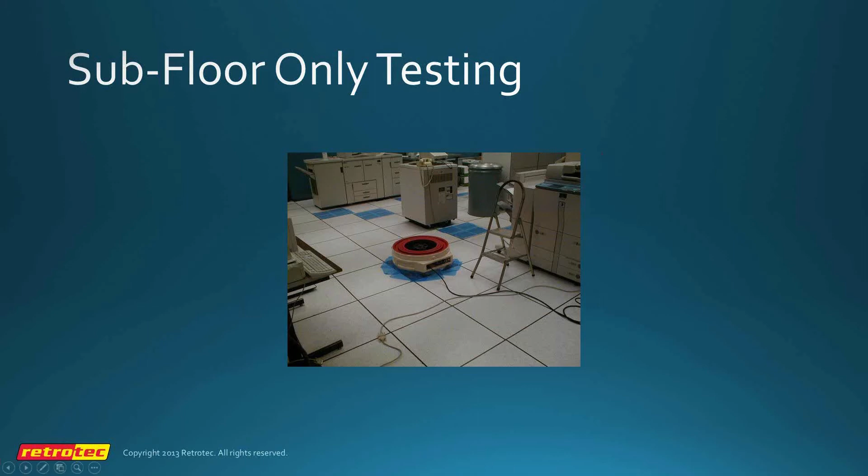So typically what happens with people when they get involved in this testing is they have a nasty little problem, they phone us and we can offer them a testing solution. The purpose of this course is to show them how to design an enclosure in the first place that doesn't need fancy testing solutions. But barring that, we're usually stuck with having to test what we've got, and there's a bunch of things that we can pull out of our tool bag to try and get these enclosures passed.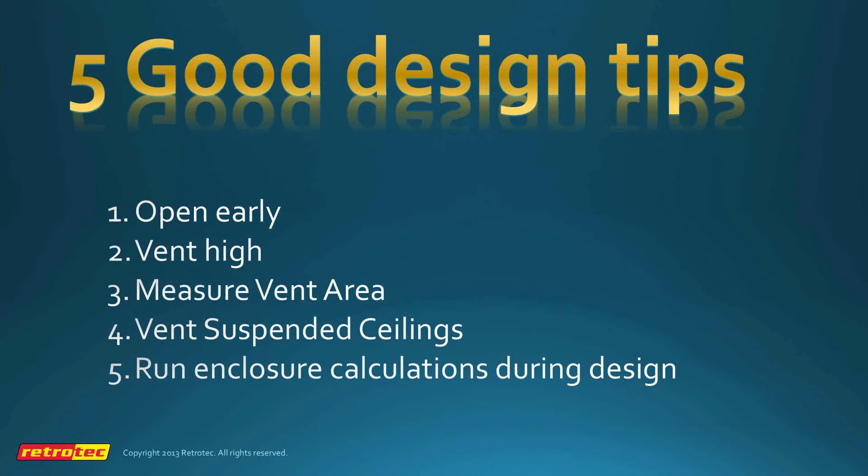So 5 design tips I'm going to share with you. One is the PRVs need to open early. The vents need to be high in the room. We do have to measure the vent area. And actually each one of these I think has a slide, so we'll just jump to the slide.

Here we show a series of peak pressures with vents that opened at different points. This vent opened at 250, this vent opened at 50, and so on. We don't want to wait until the very last minute to open our PRV because the pressure will build up and spike right past the pressure limit for the enclosure. So these peak pressures happen in a couple of seconds. If our vent opens at the peak pressure, it will go right past it. So that's why my guideline is that I'd like to see my vents open at least by 125 pascals.

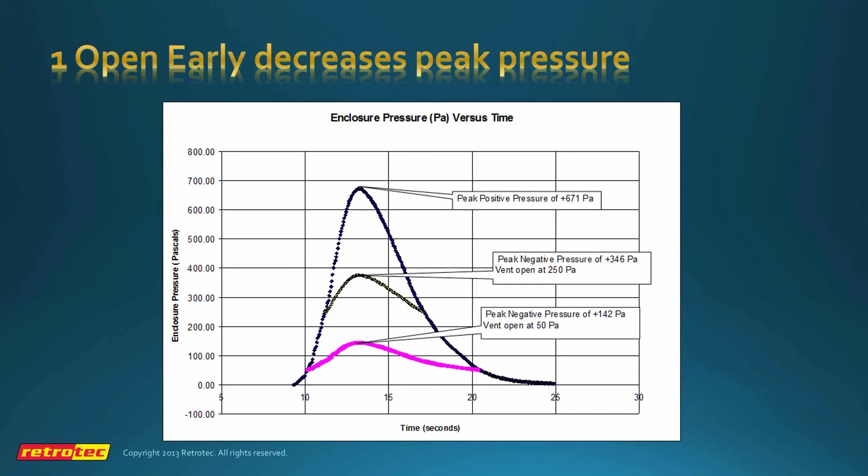Next point is when we vent as high as possible, we're venting air, not agent typically. Usually the agent is heavier than air, and that allows us to keep more agent in the room, which is a good thing. If there happens to be a suspended ceiling, there'll be a velocity across that suspended ceiling. There's a way that we can measure that. We don't want to take the suspended ceiling with us. So if the vent's up here, we need vents in the suspended ceiling if there is one, so we don't blow the suspended ceiling out, which will only handle about 50 to 100 pascals maximum, unless they have that super heavy duty suspended ceiling.

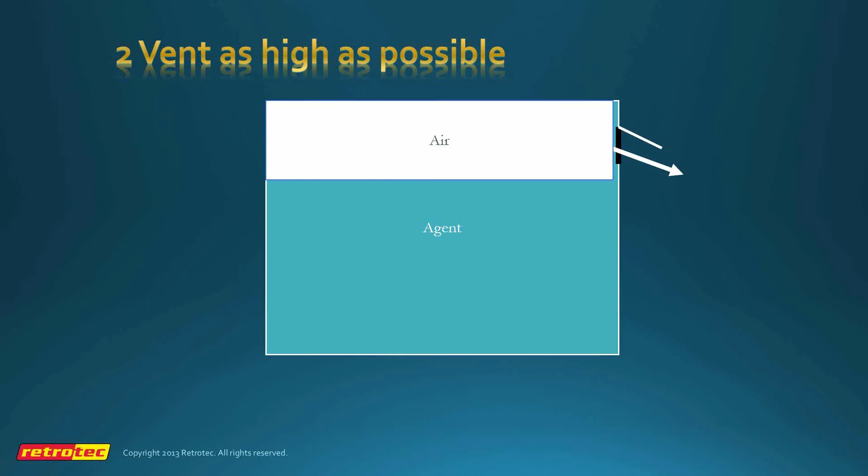Next one is that the vent area needs to be measured, and it's simply a matter of, first of all, seeing how much the vent opens at. I like to test them at 125 pascals. I notice how much the vent opens and I hold it there, and then I measure the vent path with the door fan in both directions to find out how much venting path I have.

The enclosure needs to be set up to venting conditions in order to do that, which may require different door openings and closings and such. But the essential piece here is that the door fan will tell you whether your vents work, and it will tell you how much venting you have. That's the number that goes into the equations to see what the peak pressure is.

Just because you buy a vent that has a vent area of 1 square foot does not mean you're going to get 1 square foot out of that. You may only get half that or even a quarter of that. So by actually measuring the vent area, we put the proper number into the equations and determine what the actual vent area will be as opposed to what it was supposed to be in the design, which is the reason why we have failures.

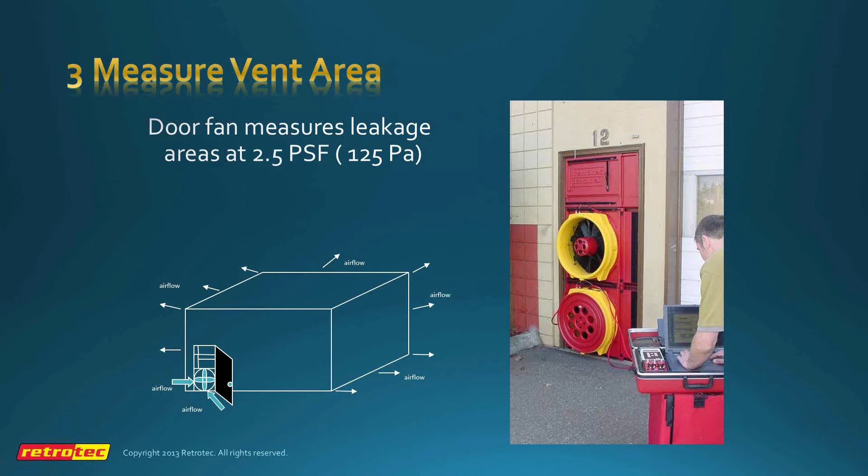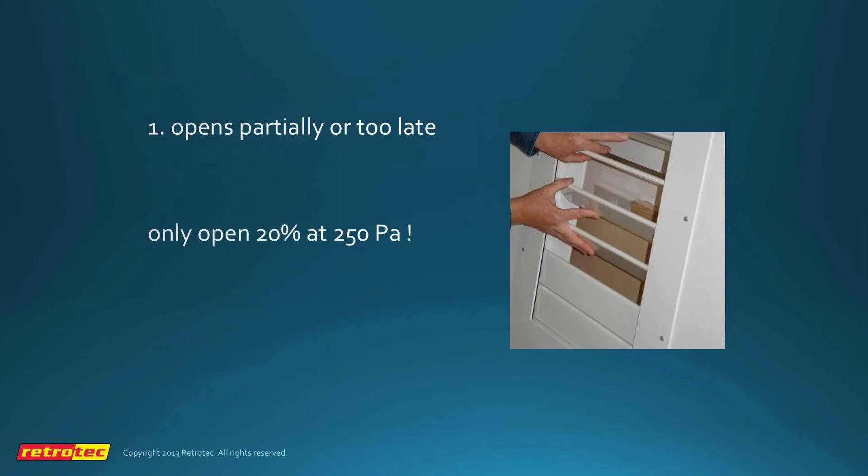So pressure relief vents open partially, they open too late. I like to actually measure the vent before I even install it. I just slap it in a big cardboard box and put my blower door on the other end and measure the pressure in the box, and I watch it to see how it opens before I even take the time of installing it.

I know several of the installers I've talked to have had multiple vent failures, and in one case they relied on the pressure relief vent manufacturer's specifications as to where the vent opens, and they somehow got pascals and psi screwed up, so they had a failure there. And then the next time they installed the vent in the wrong direction, and I think they had a third failure.

So after that they said, Colin, what we do now is we turn on the door fan. If we don't see that vent open, we panic. We make sure we see that vent open when the door fan turns on. This would be one example why, if we had this type of flap, for example, on a Halocarbon, it would close on negative pressure, and whoops, it's not going to work on the negative side.

These can also be, it says do not obstruct. I'm sure everybody pays attention to that. Often they are obstructed, or they're rusted shut, or the dumpster's pushed up beside it, or whatever. Duct is crushed. I found ducts full of debris.

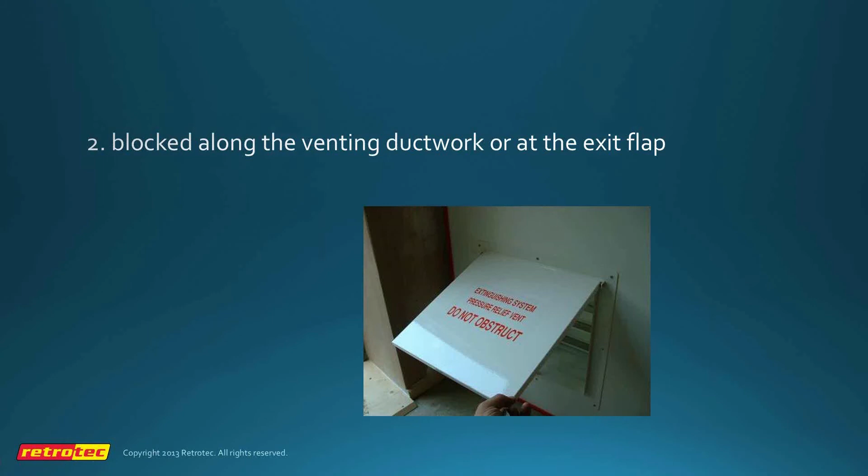Vent dampers stuck - it's surprising what you find when you measure it. I'd say almost half of the vents I've measured have one kind of problem or another, not serious enough to stop them from functioning altogether, but certainly a significant problem.

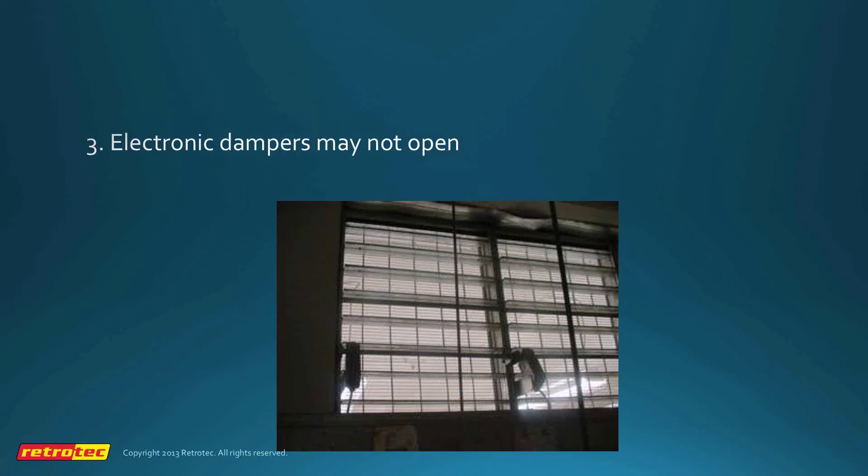Electronic dampers may not open. They need to be checked in the annual inspection to make sure that they will open. In some instances, if those dampers don't open and the system discharges, you may create more damage due to the discharge than the fire event itself, which may not even be a fire, may be a false discharge. Or they can be installed backwards, which I've seen.

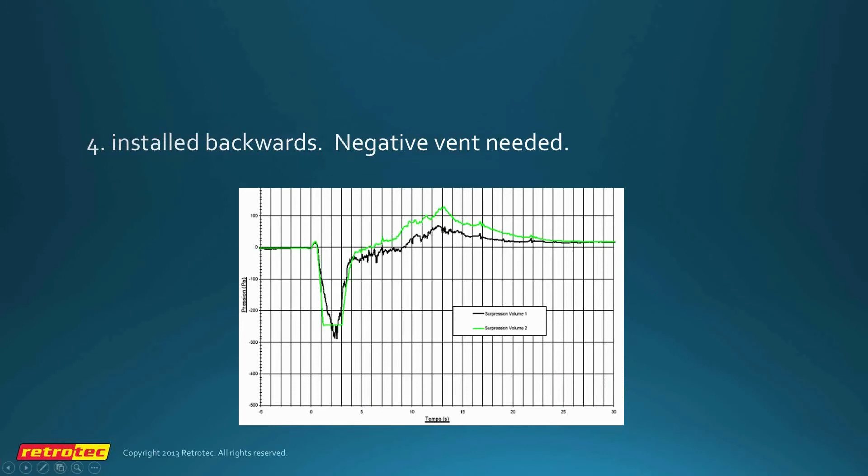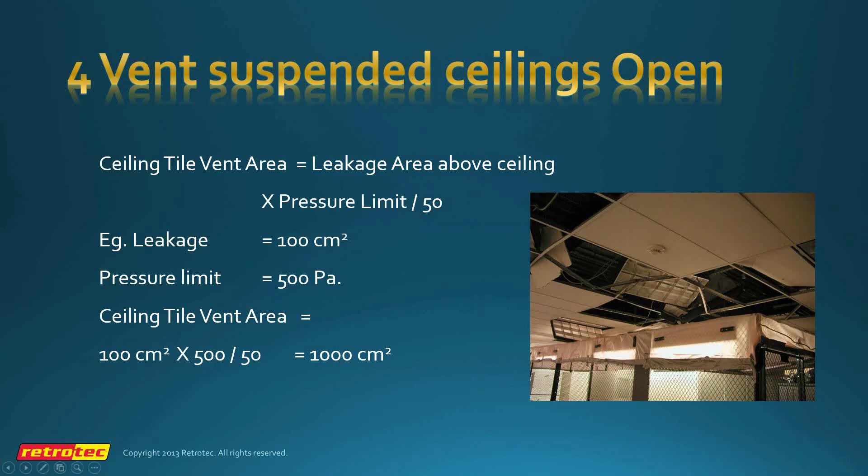Or here we are, I call this the ceiling vent. Earlier I talked about recognizing that the suspended ceiling will only take about 50 pascals, 100 pascals maybe. This damage could be caused by velocity from the nozzles, which I don't think, or could be caused by excessive pressure in the room, and the enclosure is trying to vent through the suspended ceiling, but it's taking the suspended ceiling with it. So in this case, we need enough vents in that ceiling, and there's a very simple way you can measure that with your door fan to determine whether there's enough venting in the ceiling, which is oddly enough in our training course.

And then the fifth one is to run the enclosure calculations in the design phase. Take a look at peak pressure, take a look at hold time. Look at the variables that you can change easily in the design phase and make those decisions. When people have questions, they often phone us and we say, well, in this situation, if you do this, do that, you'll be fine. If you do that, you won't be fine.

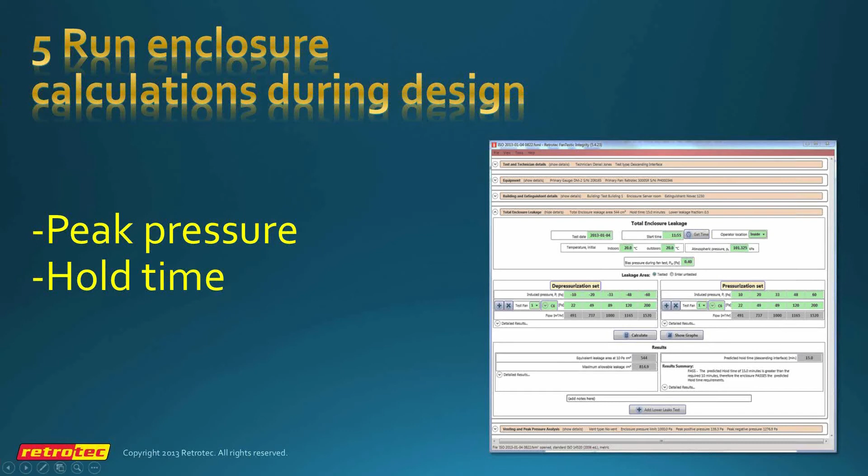So we've got a brand new enclosure integrity training. We no longer support our old software simply because it doesn't handle peak pressure properly. We don't want to have the liability of saying, oh well, we used your software and it said it was okay. That's why we no longer support it as of the end of this year, and we're encouraging everybody to use our new software. Our training is online, and it's miles ahead of what our training was before. We're encouraging everybody that uses our new software to go through the training and get certification.

Level 1 is for AHJs and FPEs. Once they go through that, we're happy to answer their questions and so on because we know the body of knowledge that they have, and we don't have to explain the basics to them. So along with our training, we offer support.

Currently, our training certification period is 3 years, and there's a recertification fee after 3 years. We are adding new material to our training course all the time, so in 3 years it'll be quite different from what it is now.

The other support feature that we insist on is that people will be using our new software, not our old software. So having a combination of a new software and new training will give you all the support you need and answer any peak pressure or enclosure integrity or hold time question you may have.

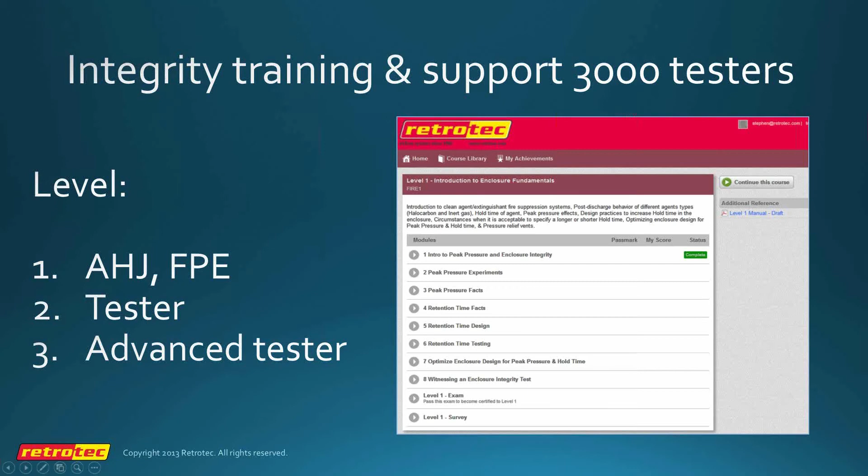This is the final slide, oddly enough, I think. Yeah, this is the final slide. If I haven't answered your question, send me an email at Colin, C-O-L-I-N, at Retrotec.com. Now I'm going to go to - I've got a juicy selection of questions here, and I'll just continue as long as you people stay on the line. We still have tons of people on there, so let's go through and answer as many questions as we can.

So we've got a really good question here from Paul Jennings, who's probably one of the most experienced testers out there. He works out of the UK. If you ever need any support on UK testing or whatever, he's the man. He may have done more enclosure integrity tests than anyone on the planet, I'm not sure, but certainly has bags of experience.

So he says, let's see if I can actually - yeah. We recently found pneumatic PRVs on an Argonite system 8 years old, which no one knew if they would work, nor was there any means of testing it. The end user has now instructed their fire maintenance company to modify the Argonite system by fitting valves and a place to fit a small cylinder to prove the PRV open.